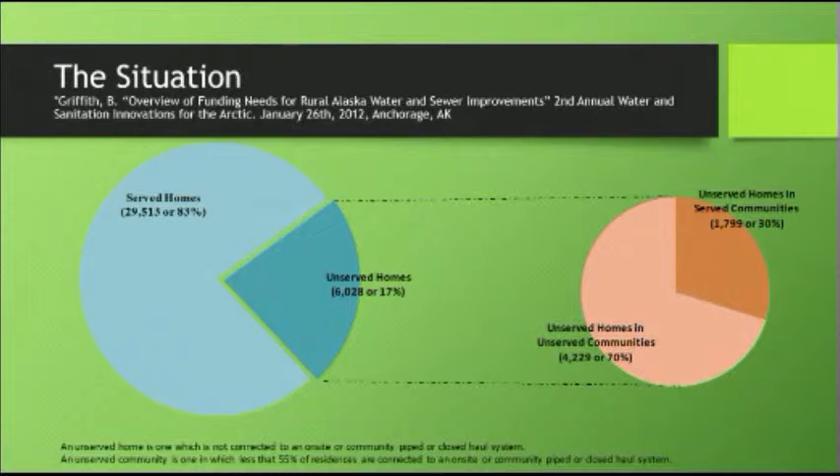Of these, they broke that down further into homes that could probably be funded and connected to the existing system, some that have no funding but need to be connected, and some that are just considered unserviceable, meaning the home might not even be structurally sound enough as a place to really live, so putting infrastructure into that home probably wouldn't be a good idea anyways.

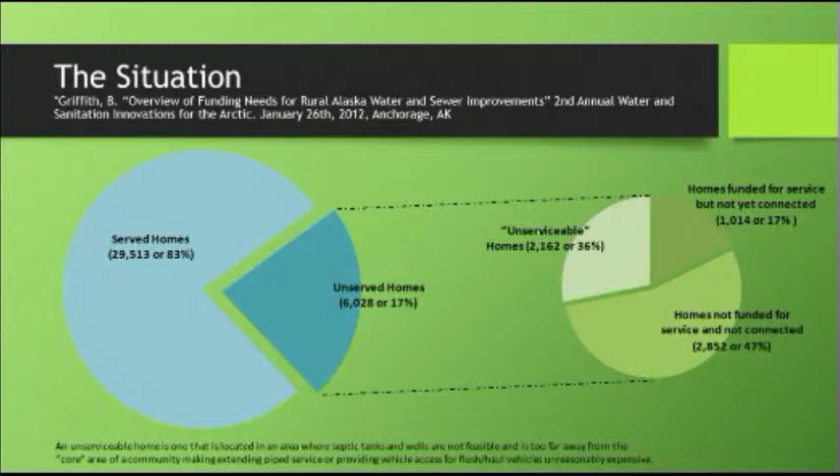So with this, the project, the Alaska Water Sewer Challenge, evolved mostly because the funding gap between what funding is being provided to the state and what funding needs to be put out into these communities to meet their needs with respect to installing plumbing is getting bigger and bigger with time. In 2013 it was 638 million; the last number I saw was 660 million. So it'll just keep growing, and I can only imagine it'll start growing faster as some systems fail that are being challenged right now.

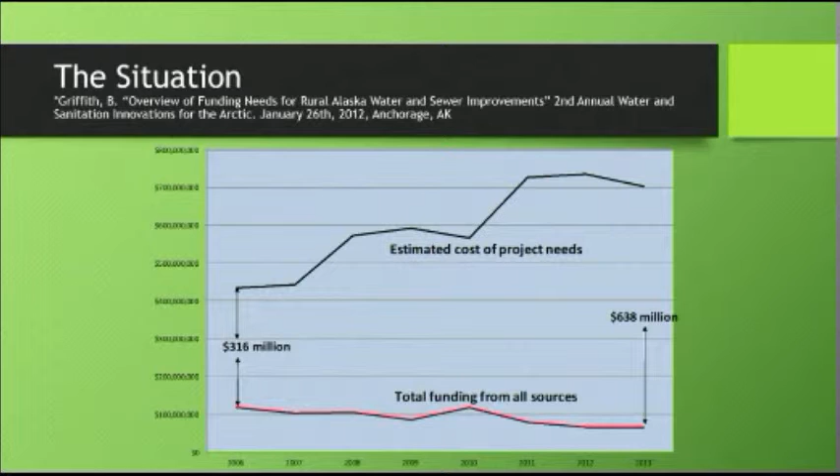Beyond its initial capital cost, which most rural communities are granted their infrastructure without direct cost from them, the operation cost is left up to the communities themselves.

So how can we bring the monthly, annual operating cost or bill to the consumer down? Utilities as it stands cost too much to install. Monthly costs are way higher than people can sustain. Where do we go from here?

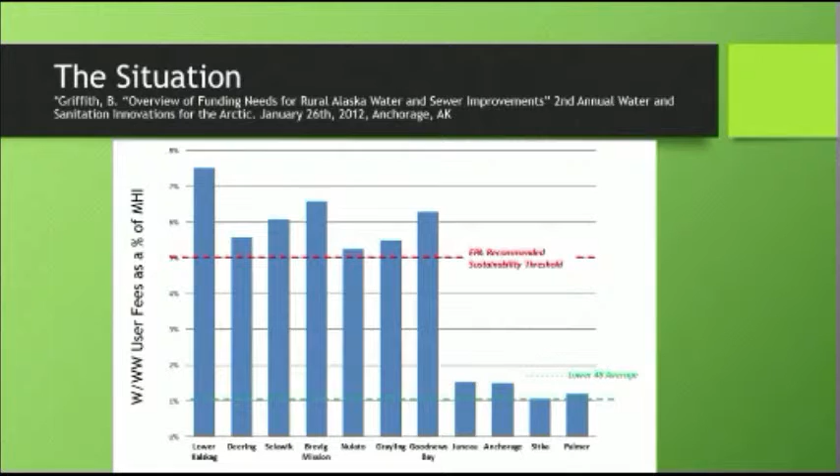So we look to another concept looking at decentralized water, putting water in people's homes. The most classic term is well and septic, but our conditions here in Alaska make well and septic a bit of a challenge in some instances. So this project we're going to talk about today is, if well and septic doesn't work and if nothing else works, this concept of water reuse has a possibility.

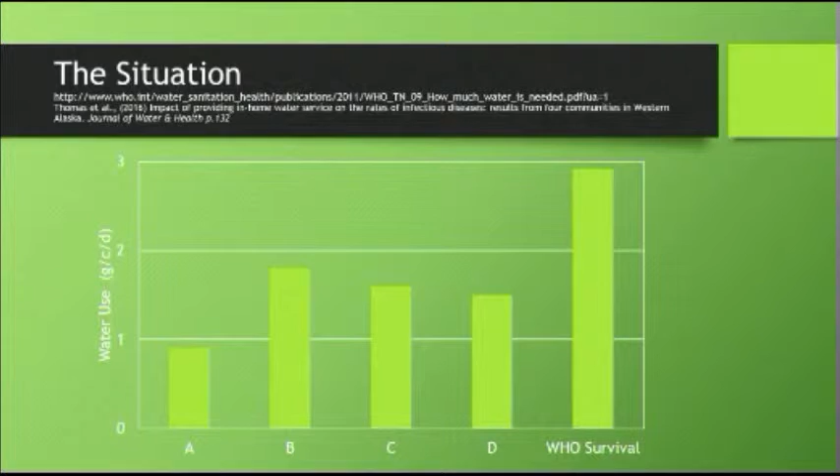So some of our communities, when you get plumbed water at your house, approach that. Community D, on the other hand, didn't change much. They increased probably 3 or 4-fold, but didn't get up to a really high water use, primarily because their billing structure was prohibitive and essentially made people drastically conserve water to avoid the user fees. So even in that case of drastic conservation, we're now at least above the WHO's survival requirement, which is a good thing.

Looking toward the Alaska Water Sewer Challenge, we are targeting 15 gallons per capita per day. So we're above Village D, but notably below the other villages, as well as below the national average. But the hope is that that amount of water, if used appropriately, would still feel like you're in a fully plumbed home. It wouldn't be any different, just you'd have to conserve water.

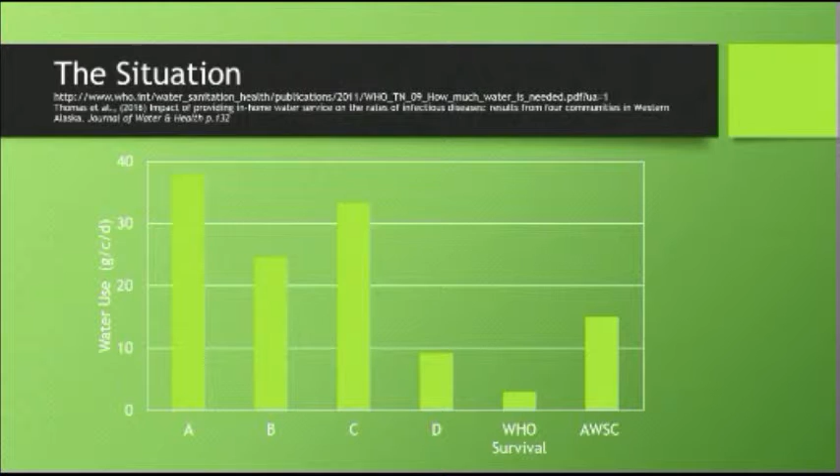Taking from the Alaska Department of Environmental Conservation's website, we can take the challenge they put out: develop innovative and cost-effective water and sewer systems for homes in remote Alaskan villages. Technologies to be addressed are decentralized water and wastewater treatment, recycling, and water minimization systems, to significantly reduce the capital and operating cost of in-home running water and sewer for rural Alaska.

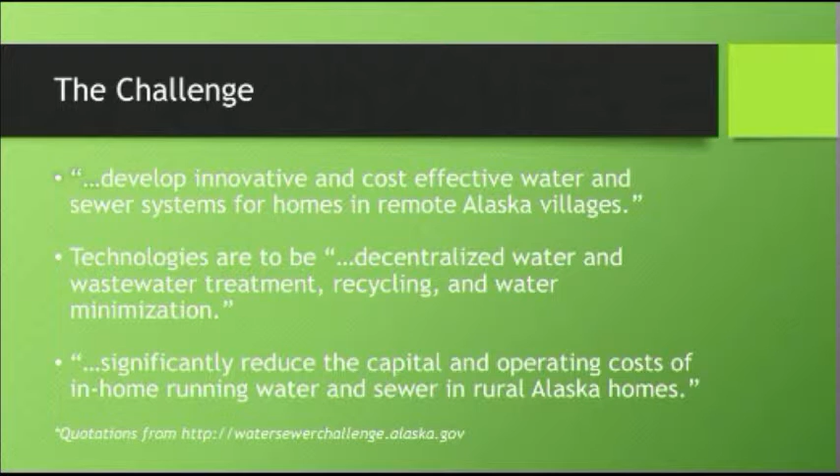That's our goal. With that goal, they've defined 5 phases of this project. We currently are in phase 3. Phase 1 happened in 13-14, forming our teams. Phase 2, we were funded for a year - 10 teams were funded, and 6 teams were funded for a year to go out to assigned communities.

So, pretty aspirational. I think this project is definitely on the national radar. We're the first to pursue something like this at the household level.

Decentralized water reuse has become a pretty hot topic. The City of San Francisco has pursued this hard with the Water Reuse Foundation, but they're really trying to consider reuse as just for toilet flushing, irrigation, and waters not for human contact. This changes the game. We want water that's going to be in contact with somebody as they take a bath, a shower, use it in their home for hygiene, and how might that vary from drinking water?

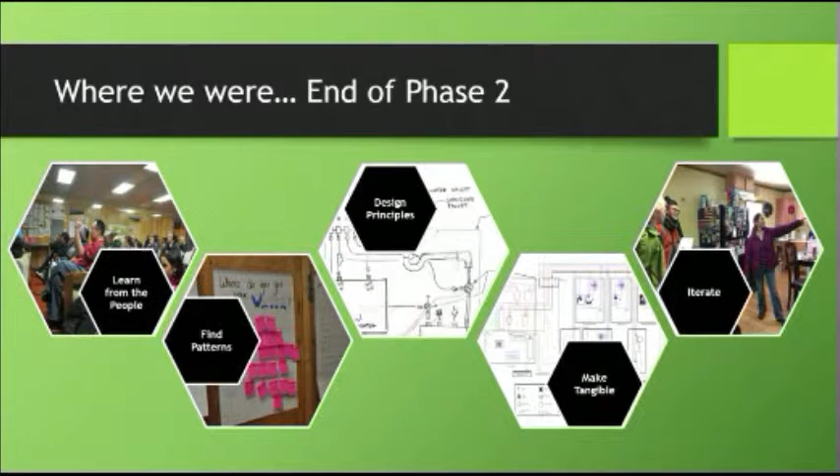So what did we learn? This is my summary of a variety of the questions we had. We asked some basic ones and then some quite complex ones. First one: how many people lived in your house?

Blue is Koyukuk, brown is Kipnuk. Less people live per home in Koyukuk in the interior than out in the YK, which didn't surprise us. The YK is growing and the interior in many rural communities is shrinking a bit.

Did people leave their house in the winter and allow their house to freeze? More did in the interior than the YK, which is interesting.

If you had to put a treatment system on at your house to reuse water, would you mind it being in a box outside your house? No one seemed to mind. By the way, the ones on the left are positive, the ones on the right are negative.

How many showers would you take a week? We asked this because the state, in our contract, had defined how many showers they wanted us to design to - a house with 4 adults, each taking 2 showers a week. So we asked, how many showers would you take as a household?

It was interesting to see quite the difference between the two communities. Koyukuk didn't seem to mind having fewer showers than Kipnuk. The other interesting finding was that Koyukuk had a washateria that was very well used, and the showers were very well used. Kipnuk had a washateria that was pretty well used, but everyone also had steam baths at their house. So the fact that people wanted still more showers in Kipnuk, as well as having steam baths, was kind of interesting.

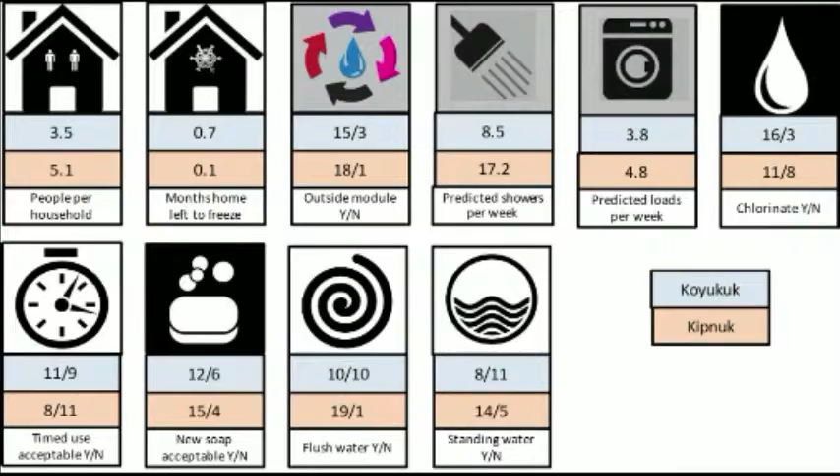With that, we moved on and said, all right, the state has delineated what treatment processes and fixtures we require. Through one of our questions, many people said, hey, our house isn't big enough to have a toilet, a kitchen sink, a laundry, a bathroom sink, a shower, and whatever you need to provide drinking water. So it became very obvious that we needed to treat all of these fixtures as modules in our system.

So we made them exactly that: modular, designed kind of independently of each other. You could have one, you could not have one, and it didn't matter to the treatment system. Outside of these modules, we had a core module. So for later on, I'll try to highlight: this is our toilet, as expected. Double sink is the kitchen sink. Washing machine, shower, bathroom sink, and the bucket with the water drop is the receptacle for our drinking water or other water, as you'll see later. So we had these six different fixtures you could put in your house, plus one core module that would live outside of your home.

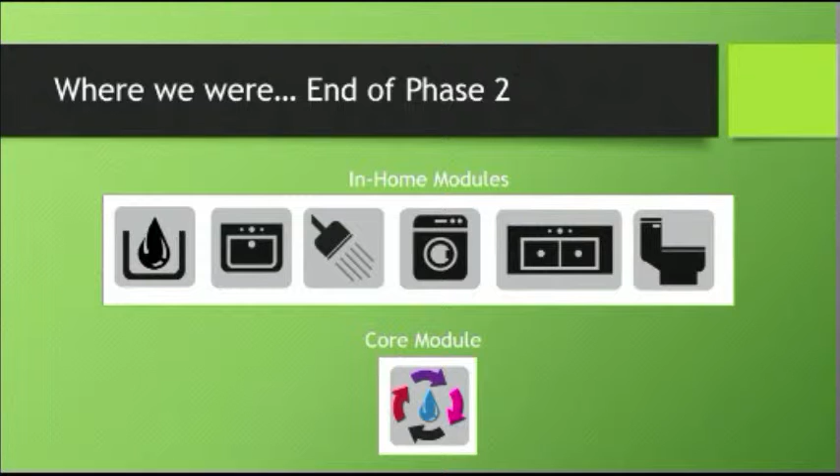The interesting thing we did with our fixtures is a lot of people said, hey, you guys are going to retrofit all these fixtures into our house, that seems like a whole lot of work. Having gravity plumbing, we know gravity plumbing freezes. With vacuum toilets, we had the most spectacular people share crazy stories about the excitement of using their first vacuum toilet. So we tried to look a little different.

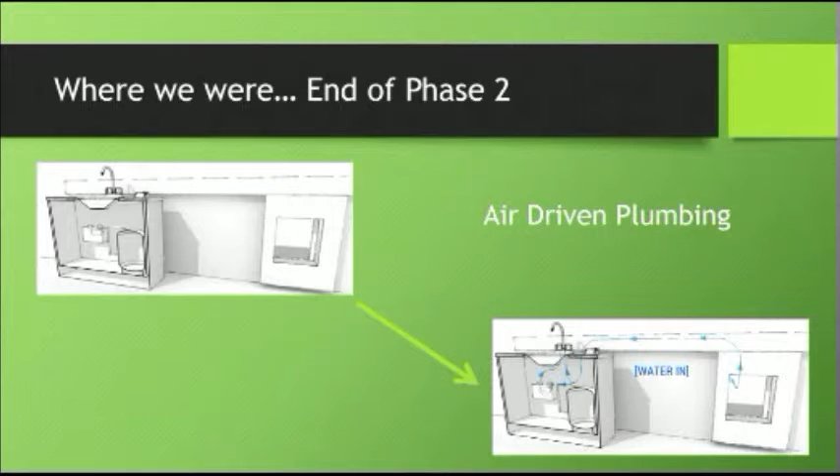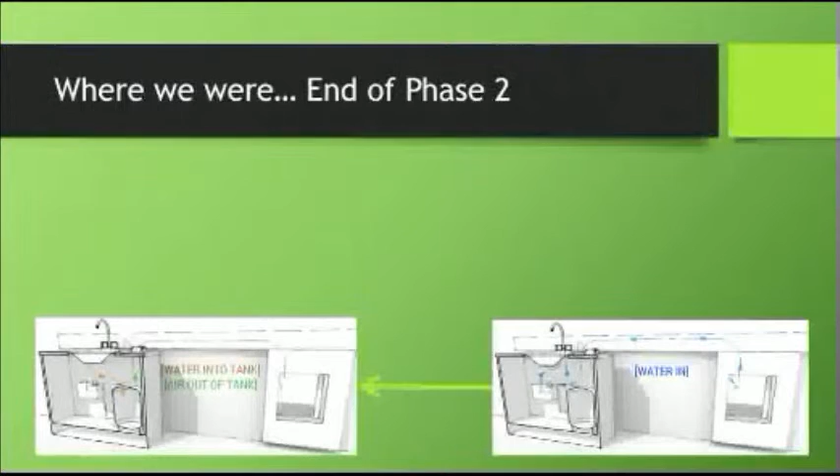This process isn't uncommon. In fact, if you've had beer out of a keg, you've experienced this process firsthand. We're using air-driven plumbing for the most part. Imagine your sink, instead of going to a drain pipe, has a vessel below it. Water fills in your sink, comes out of your spigot, fills this vessel below your sink. When it fills, the vessel is vented out to the atmosphere, outside of your house—you don't want potential sewer gases coming out of that area. Once that vessel is full, it says, hey, I'm full, do something about it, and it closes the tank.

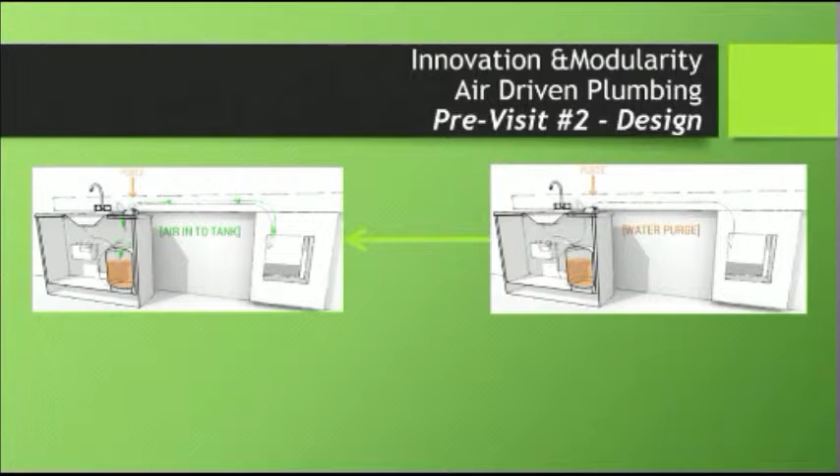It allows air to enter into the tank. There's a tube that comes out, the thing that would dispense your beer into your cup, and now it's dispensing water out of this tank. It dispenses the water, exchanges it for air into the tank, sends it back out to the treatment module.

Now our system is clear and ready to be reused again. The benefit of doing this: all of our plumbing on our sewer side can be very small diameter. We're pressurizing it using low pressure air, about 15 psi. No gravity plumbing. The other bonus, we can blow the whole pipe dry when it's not being used, so the line headed out through the wall into another heated vessel or container could be dry. No chance for freezing if there's no water present.

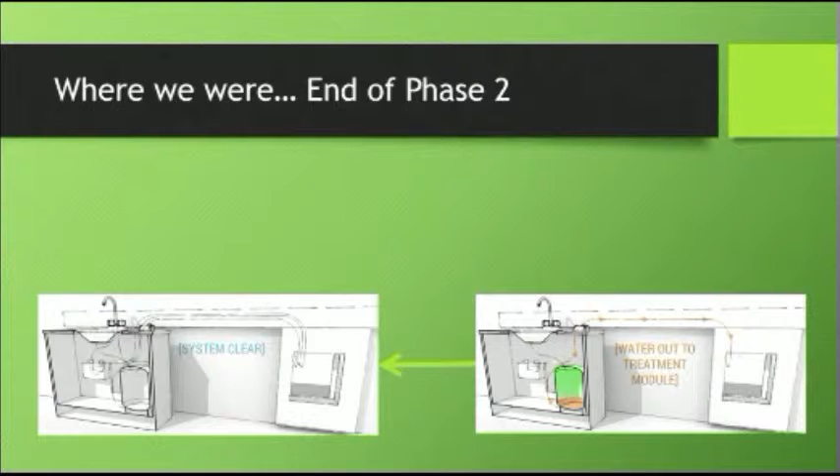A primary loop, which allowed drinking water within that loop to be dispensed at your kitchen sink and your bathroom sink for washing your dishes, cooking, brushing your teeth, things where you'd want the water in your mouth. The secondary loop around this main one is the treated non-potable water. We called it that at the time of our first presentation; it was dispensed to your fixtures for general hygiene use, washing your hands, washing your clothes. It was then processed as gray water to a membrane system, which retreated it to be recycled in that first primary loop.

Your kitchen sink water can be pretty nasty. It can have oil in it. It can have other things that you might not be able to easily treat. It's sent over to another treatment system and then recycled in a much smaller loop to allow the toilet to flush.

In this system, you had to provide drinking water in at 2 gallons per day. You had to provide some other source of water of your choosing into the system at 8.6 gallons a day. You had to haul what you flushed, the full flush in your toilet, at 2.5 gallons a day, and you had to haul the treatment waste, which is concentrated gray water, at 1 gallon a day. And then there was some excess water left to be dumped on the ground.

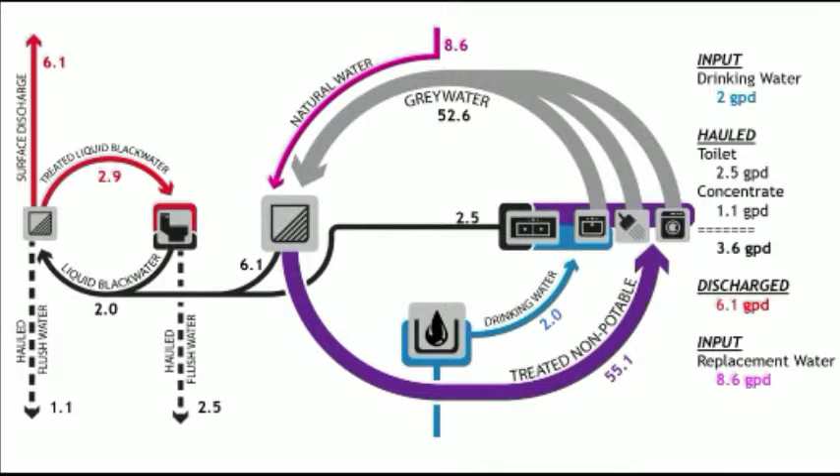We had some concerns from the state and others about discharging water onto the surface. Would that cause a glacier in the winter? It also caused some complexities doing it this way, so we continued to evolve through phase 3 to select our treatment process. We'll continue down that road.

This is what we showed the state for what our fixtures and treatment process would be like. The drinking water module I mentioned would be a container like this in your home, built in to look like a cabinet. You could open the lid and pour your drinking water in from wherever you comfortably feel you want drinking water—blue being washateria water, pink being ice melt, snow melt, you name it, whatever you like to drink.

Underneath the sink, we have a small filter for coarse filtration, something like this, which is a 1 micron filter just to take out debris. And then we have a small UV system. That would ensure that even if you brought water that was good in every other way, but maybe contaminated it with dirty hands and had a pathogen or two in it, at least it would be safe and not get you sick tomorrow.

So we're left with this question: will the UV protect against viruses adequately? Bacteria is easy—with UV it's viruses that are hard. So the dose on this UV device would not be suitable to handle adenovirus.

For 4-log adeno, you'd probably get more like 2 out of it. This one was sized at 40 millijoules per centimeter square. So bacteria, no problem. Crypto, no problem. Giardia, no problem. Viruses, only 99% removal, not 99.99.

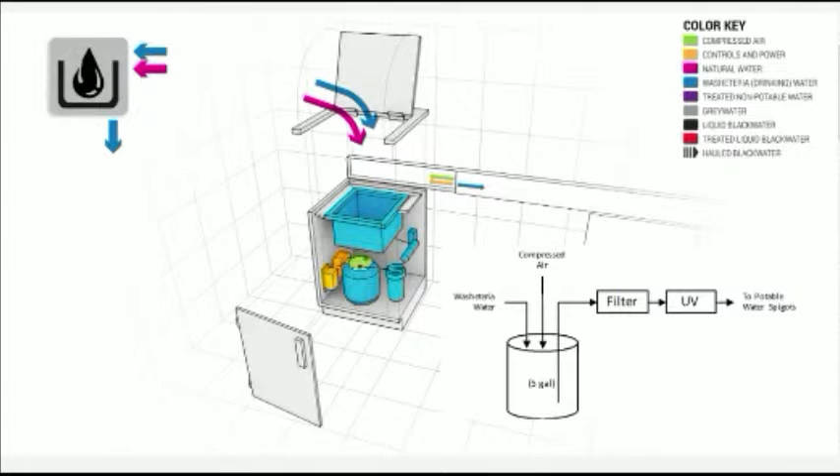I'm not particularly worried about this system, because people in rural Alaska, as well as me, when drinking from water sources that aren't coming out of a trusted spigot, are pretty careful about where they get their water. I don't go pick water from a place known to be contaminated. So hopefully this will give you just a little extra assurance of treatment, but not a whole lot.

The next thing we designed was a little 10-foot connex to put all our treatment system in: 2 treatment vessels or devices, which is this black column and this purple column, and then some tanks, which are the barrels up on the shelf, and our air compressor, all fit within the 10-foot connex, so that hopefully all of the things needed to be taken out to the community for installation could fit there. So we pack it up here in Anchorage, send it out to the community, it gets constructed. The container that it was shipped out in would be the container that would house the treatment system - no backhaul required. So we left this, we were pretty comfortable with it.

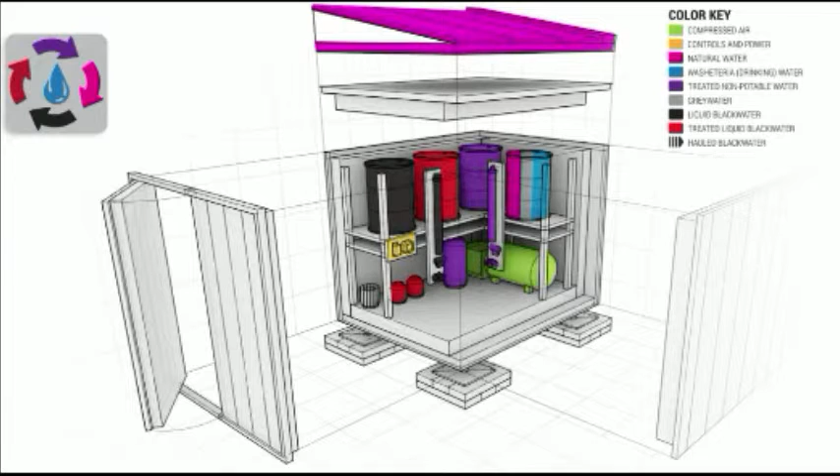These are the two line schematics of the treatment systems within that housing. We collected gray water, coarse filtered it, and it went through a nanofiltration system. We had 2 UV systems in series to achieve 4-log disinfection of viruses, and it was then stored for reuse. Black water was the same thing - it was treated for reuse in the toilet, and then the waste product was ready to be hauled off site in another system. So we were pretty comfortable. I think the state was comfortable enough with what we did that we moved on to phase 2 with this.

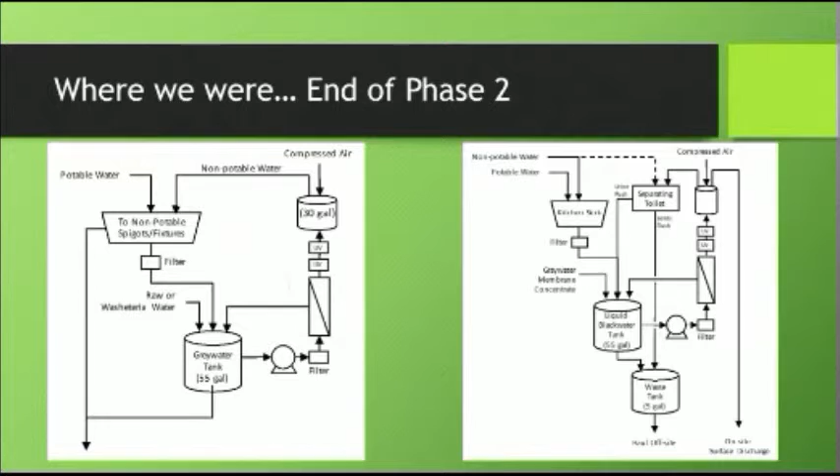The one thing you'll notice is that I only have one membrane. This is our membrane housing, which we had in both the old design and now in my hand, so obviously it's in the new one too. This is our membrane system. Most membrane systems work in arrays with lots of membranes to get the recovery you're targeting, but we don't have that opportunity here since we're minimizing components. So what we're going to do is this membrane concentration in a single batch.

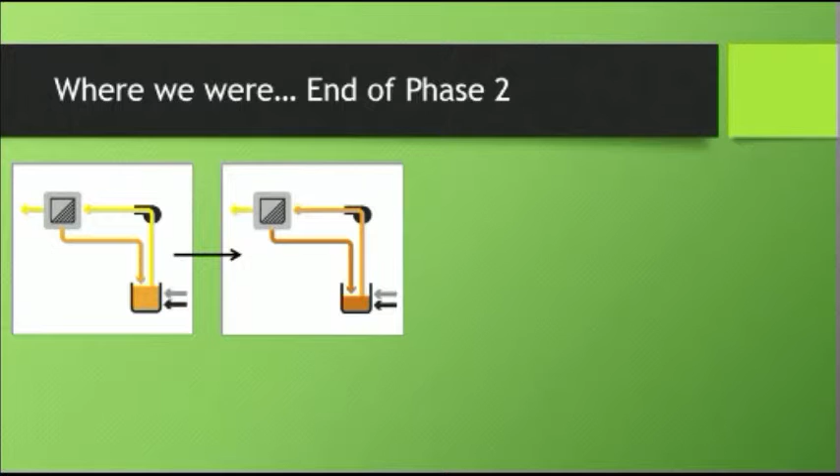This figure shows that: here we have a tank of water. We draw water from that tank, the treated water goes through the membrane - that's our slash - out the other side. The water that's now concentrated by the membrane is returned to that tank. We continue to recycle, meaning that tank gets more and more concentrated with time, and keep going. Now it's delineated as red, so that water has become too concentrated - we don't want to continue treating it anymore, and now we send it out to waste.

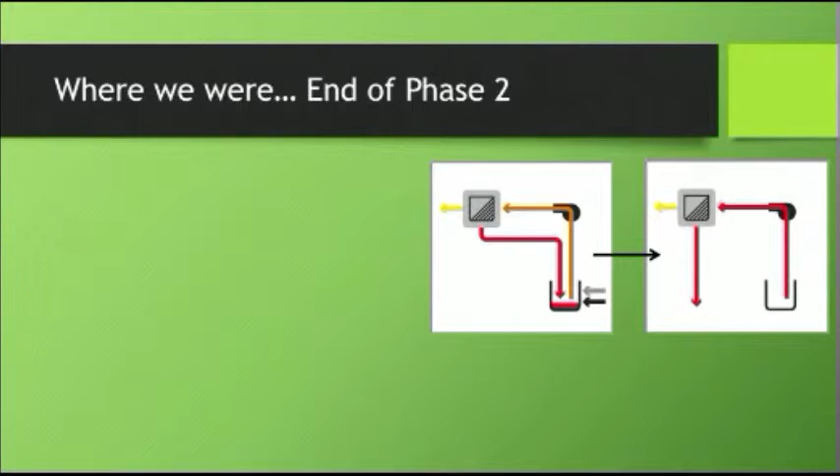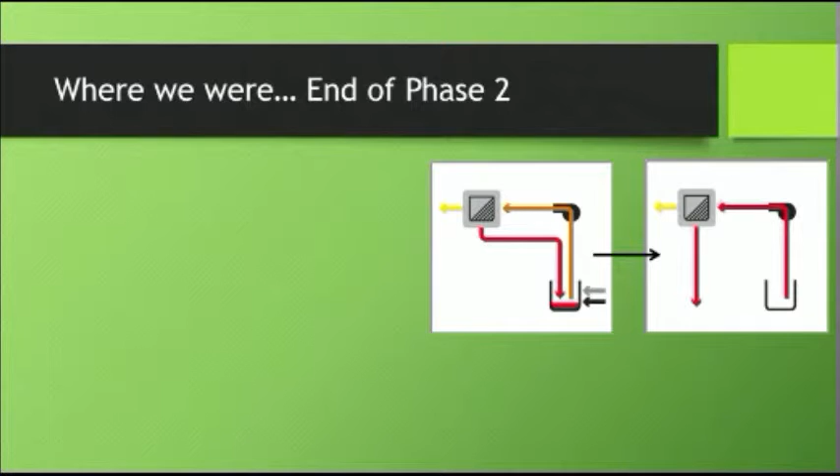We try to think of our water like a sponge. Our water picked up all this debris from coming into your house. You want to get all the debris out, but you still want the water, because you don't want to have to go back and haul more water from the washateria or the pond. So we squeeze that sponge - get all the water out - and then throw the sponge away. We're using this idea to try to maximize use of our membrane system. Then once the tank is empty, refill it and start over.

How do you monitor or control it? We're going to probably be using conductivity to look at the concentration of salt. The water being recycled - our membrane can actually reject salt to some degree - and once it gets so salty, we're going to get rid of it. Trip it and dump it.

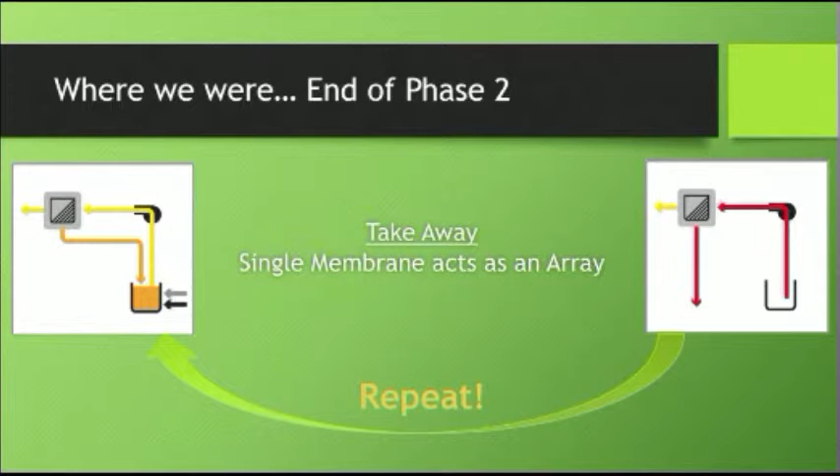The other thing we have up here is what we're using to help maximize use. I think an impression we got from many people in the communities was: if we're going to put a toilet in our house, and we're trying to look like a house that could be anywhere in the world in a developed community, we want a real toilet. We don't want a piece of plastic or metal from an airplane. We want a real toilet.

So this is a toilet created in Sweden called the EcoFlush. It's a separating toilet—you're welcome to come check it out after the talk. It has 2 containers. It's not like the dual flush toilets you see elsewhere where you hit a big flush or small flush for the same bowl. There are 2 flushes here, but they actually flush 2 different compartments. If you hit the urine flush, the small flush, hopefully you peed in the right hole, because it only flushes the little front one. If you created solids, hopefully you did it in the back bowl and hit the big flush, and it goes out the back bowl.

The flush for urine is only 0.05 gallons per flush, really small. For a full flush, it's 0.66 gallons. A lot of people I know in California who've been playing with these say there are 2 biggest problems: one, men don't always sit or aim accurately enough to get into that small hole, and two, small children find it challenging to get it in the right place. So maybe someone needs to redesign a cool little kid seat for this.

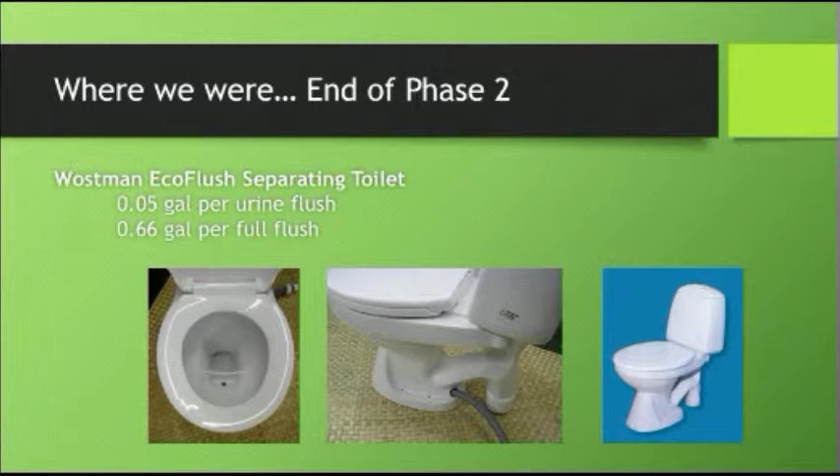Check it out—it's been a total nightmare to get this toilet, but if this works, we should directly order them from Sweden.

All right, so that's where we left off in phase 2. We were excited to get going. We knew what we designed had potential to work, but I can't sleep at night, so I continued to evolve our design.

Since then, we've changed our water conveyance scheme slightly, using small independent pumps for conveyance to the fixtures, as well as still using our air-driven collection. We've also associated independent filtration that resides in the home.

For each one of the fixtures—your shower, your laundry, your kitchen sink—you would have a pair of filters like this inside your home, so that if you or one of your children dump something crazy down the sink, you only have to fix a small filter. This is a $1 filter and this is a $3 filter, rather than dealing with whole-home equivalent filters that are like $150 each.

So it provides this: hey, I just dumped a gallon of oil down the sink, I better go get it out of my filter before it wrecks my next system. But it doesn't wreck all of your systems, just one of them. It also allows us to keep each one of those fixtures in your home independent. If you didn't have a bathroom sink or kitchen sink, and had a limited number of fixtures in your home, you wouldn't have an oversized filtration system that costs a lot to run.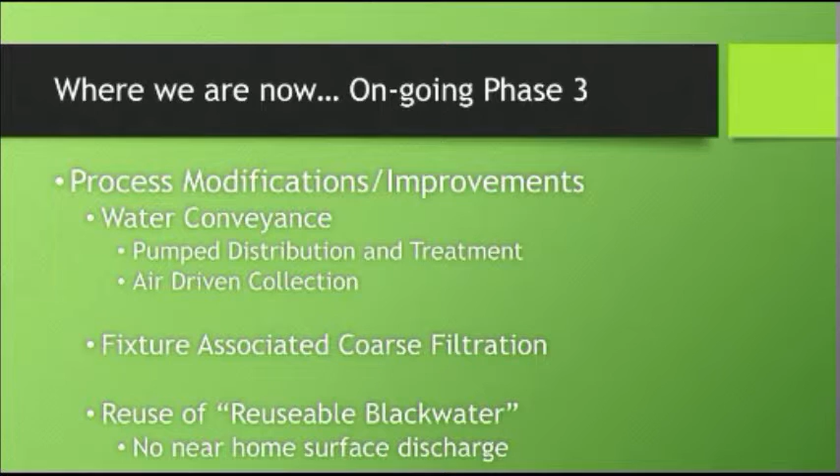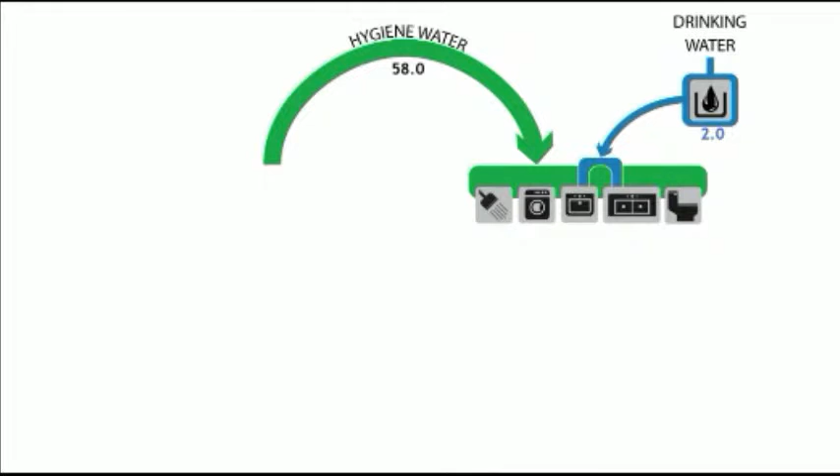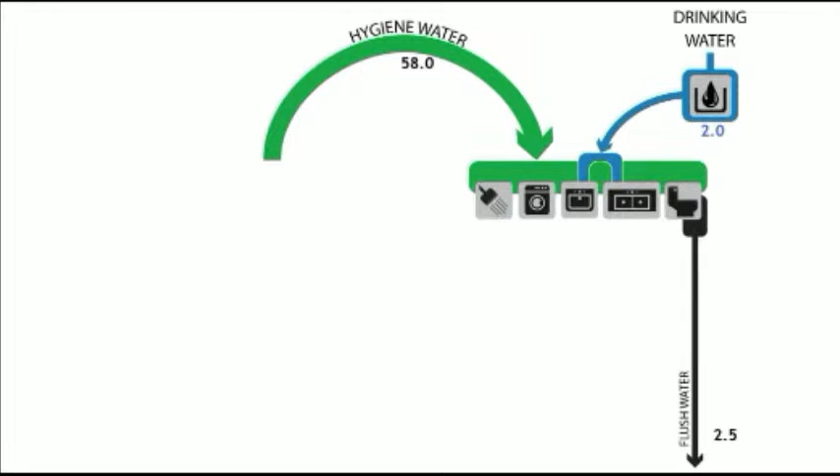So I'll explain this figure a little more clearly. This goes back to our fixtures. We bring drinking water in, dispense it to our bathroom sink, our kitchen sink. We have a toilet, a washer, and a shower. We then use that water, we flush our toilet, it gets hauled—that's the big flush on our toilet. We then use our shower, our bathroom sink, and our washing machine.

It gets sent over to our treatment, the core module, where it's treated through one of those membranes, and that membrane has a reject stream.

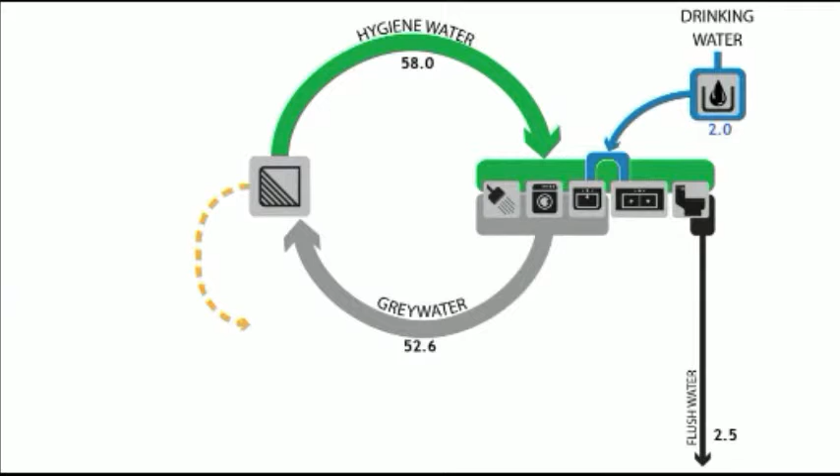If you were to stop here, which is totally a valid choice for a homeowner—though I can tell you there are people anywhere who wouldn't skip the next part of our treatment system—if we do stop here, we end up with a situation like this: you have to haul 6.5 gallons of water from your toilet and kitchen sink daily. You have to replenish your drinking water and the water rejected by the treatment system. So in this instance, you bring 12 gallons a day of replacement water in, you haul 13 gallons of water, and you bring in 2 gallons of drinking water—you're good to go.

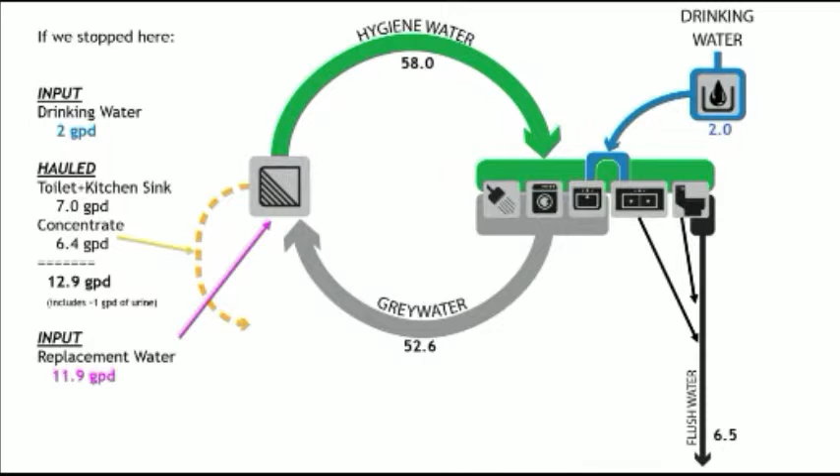Now, what we did here, and what we'll be testing on campus, is kind of the next generation, trying to go back to the true model of making something that fits in the scheme of today's current practice. So we add a second treatment system.

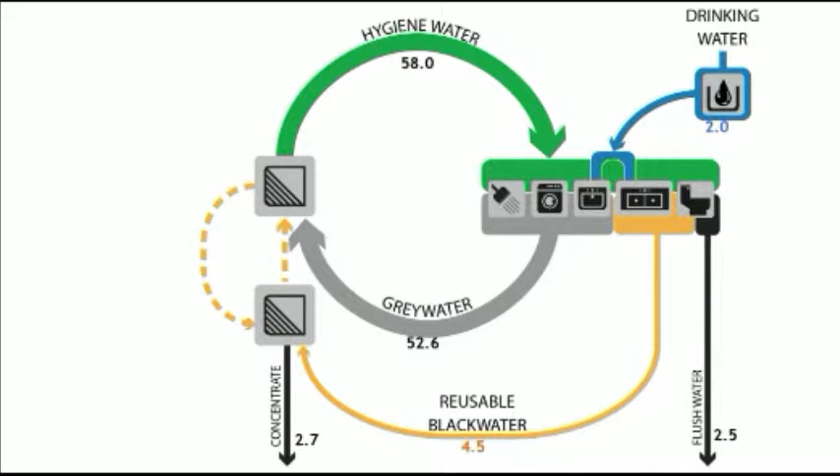This is our black water treatment system. We take the small flush from the toilet and the kitchen sink, and send it as reusable black water to the first membrane system, where it's treated. The treated water from the kitchen sink and toilet is then treated again by a second membrane before it's reused. In this instance, we only have to bring in 3.6 gallons of water from any source, 2 gallons for drinking water, and haul 5 gallons a day for waste.

So now we're in the same realm that Tim Thomas identified. In a community without plumbing, people were carrying between about 1.5 gallons per day per capita. So 1.5 gallons per day per capita in a household of 4 is about 6 gallons per day. We're bringing about 6 gallons per day into this house, and we're now getting 60 gallons worth of water use. So this doesn't change the practice of an existing community, it just increases the water available at someone's home for use.

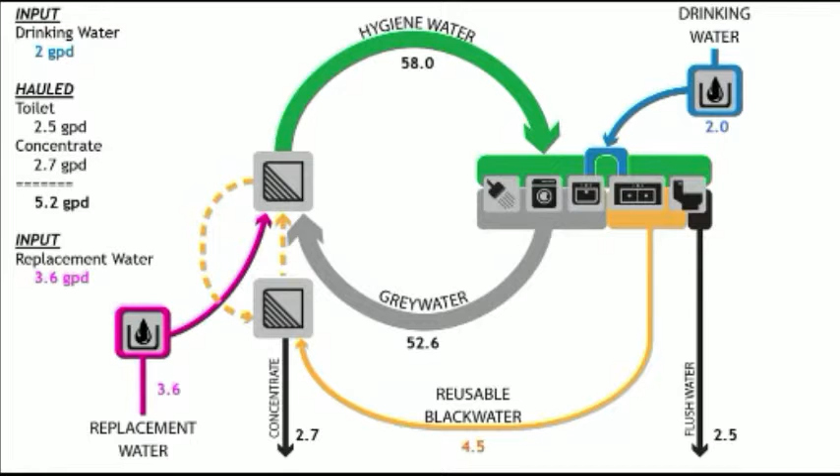So we're totally stoked. I think I might be a little overzealous on our treatment side, but I'm hopeful, and that's the reason we're using some pretty cool industrial processes here. So this is where we stand today. This is what we're building out in the back behind the building. So, things to keep in mind.

Our drinking water system, we actually have it mostly built right now. We're going to use a 1 micron cartridge filter like this, a little $1 filter, and then disinfection with 40 millijoules per centimeter squared at 2.5 GPM. This is a Viqua VT4, a little UV device under the sink.

It's a 20 watt light. So if you can run a 20-watt light, you can keep your water disinfected. Pretty cheap overall to run, added protection against transportation contamination due to UV, and basic pathogen protection.

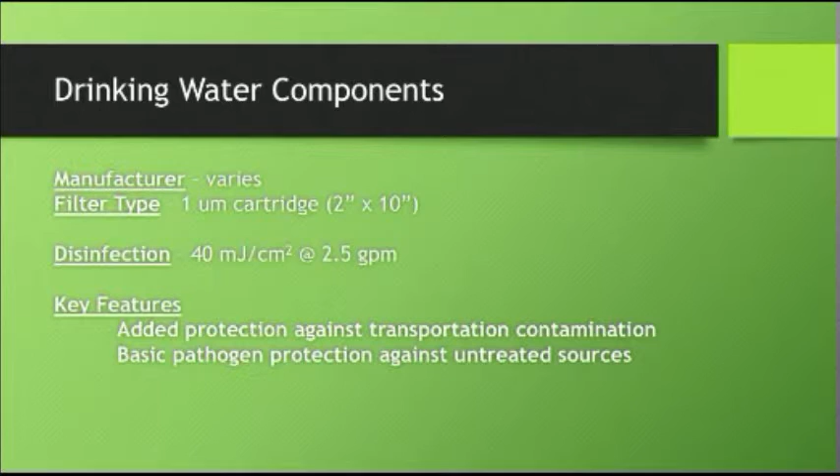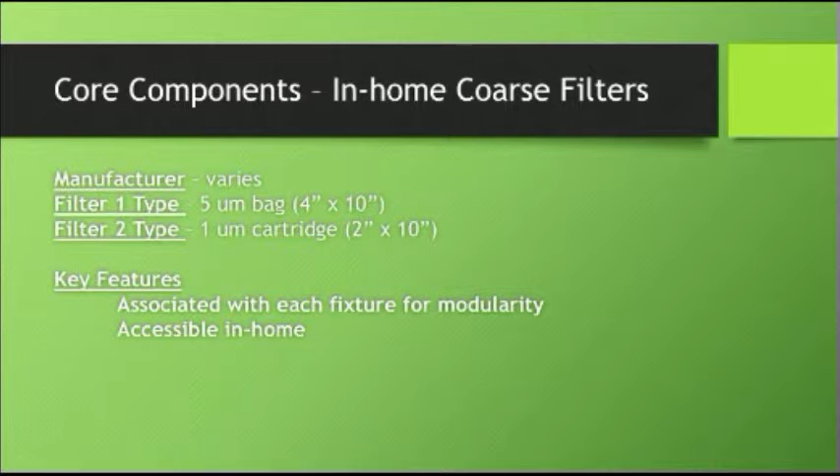So in our core module, we now expand into a pair of filters per fixture, our bag filter and our 1 micron cartridge filter. This provides the modularity we need, and it's accessible within the home in case it breaks. No one wants to go out and change a filter out in the shed outside if they don't have to, so we'll put it in the home.

Our membrane that we're going to be using is actually up here if you want to take a look at it. It's a nanofiltration membrane, a HYDRACoRe 70 pHT. It's a really cool membrane, actually an industrial membrane made to treat far more water than what we are doing. It produces water at about 5 gallons per minute, is what we're projecting right now. So this could produce a whole lot of water for your house.

But the idea here would be that if power is unstable, if other things are unstable in your community, you could produce a day's worth of water in about half an hour. So you turn on the system, run it for half an hour, and you have enough water for the next day. The pore size of that membrane is 750 Dalton, pretty small.

It rejects salt. The cool part is it's chlorine resistant, meaning if it gets gummed up, we can actually chlorinate the membrane. It can handle 100 parts per million of chlorine for cleaning, or 10 parts per million constantly. It's fouling resistant based on the charge on the membrane. The membrane's intention is for treating pretty crazy industrial compounds, and very highly colored water. So we're really hopeful with this membrane.

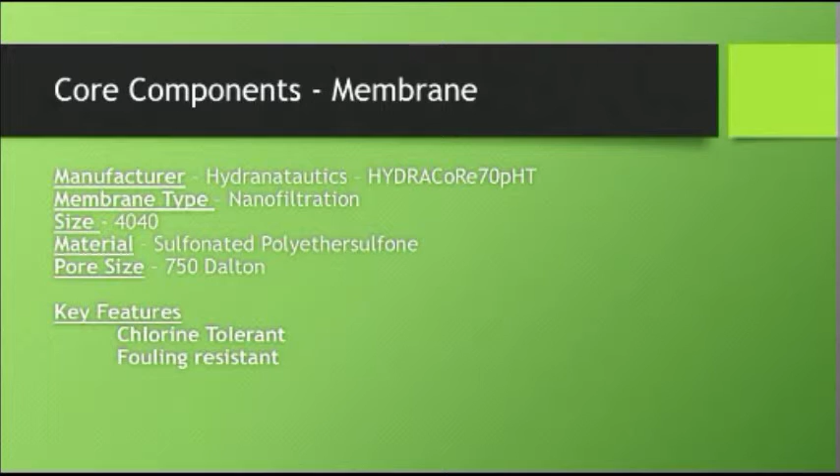Our UV disinfection system inside of the home is a Viqua. It doesn't really have a name, they just call it their adenovirus system. It's actually 2 Pro 20s in series. It's validated by the EPA at 4 log virus up to 15 gallons per minute. So we're going to actually get more treatment than we need.

And if you think about our treatment cycle, that black water is going to go through the membrane and the UV twice. So we're going to be doing almost approaching possibly photocatalytic, or not photocatalytic, photolytic oxidation that we might have. Again, this will only be run when you're producing water, so that half hour a day, you turn on these lights, it runs, and it turns back off.

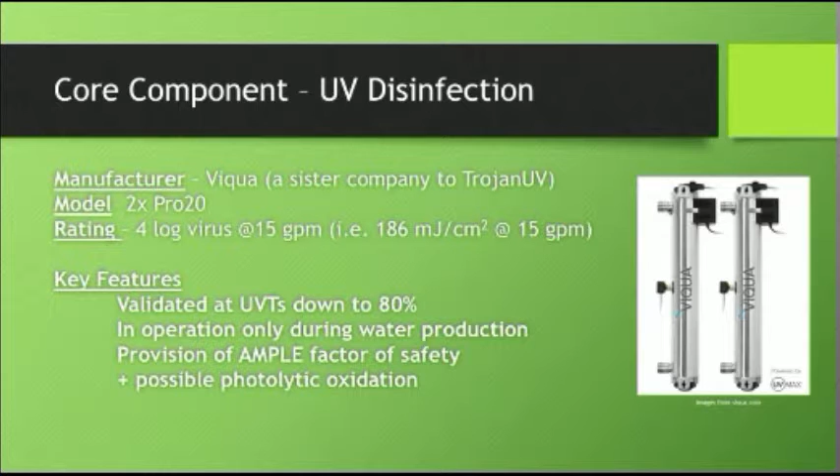So I didn't have time to redraw this, so you get to look at my hand sketch. This is the hand sketch we sent to the state illustrating how our system works.

We're actually going to be reusing parts in the system. We have one pump that drives both membrane systems, and one UV device used for both systems. There are valves in the system so that if we're treating black water, we take water from the liquid black water tank, use our pump, treat it with the black water membrane, pass it through the UV system, and put it in the gray water tank. If we're treating gray water, we use the same pump, pass it through our gray water membrane, use the same UV, and put it in the hygiene water tank.

This allows us, with the valves, to keep our membranes washed with clean water. It also lets us give a homeowner the choice of, hey, the kitchen sink and the toilet - I don't really want to deal with that in my house. So as a homeowner, you can just select to not use this by valving out part of the system. You don't have to change the drawing.

So the homeowner is going to need to turn some valves every day? No, all of these are automated valves. So we'll have a system built together. I'll talk about automation.

So in this, as you'd imagine, the black water goes through all of this treatment, all the way to the hygiene tank, and the gray water only goes through a small amount. Based on the literature, for black water we have 8 to 24 log inactivation of organisms, and pathogenic removal of 10 to 24 log. So 10 log is 99.99999999% removal of pathogens.

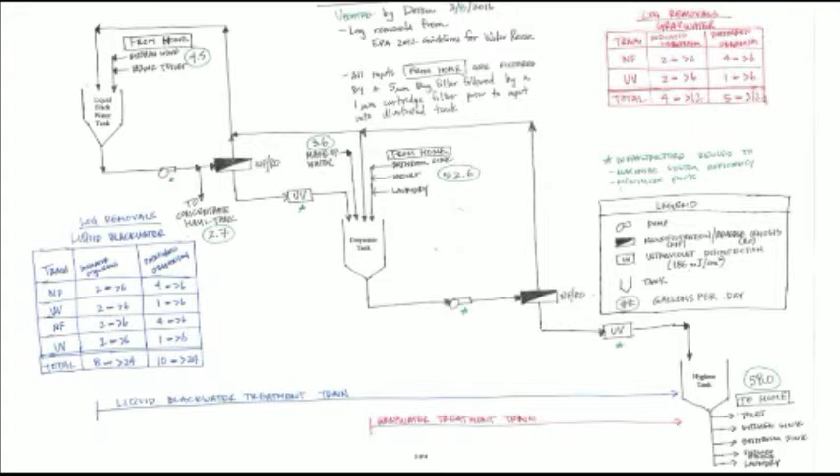So we did some preliminary testing, not with this membrane that we have. I'm more hopeful with this membrane than the weird Chinese membrane I had in the lab. We took a little system in our lab, a little pump. In here we had a 1 micron cartridge filter and then an RO membrane that was not a very good one. And we treated gray water that we made.

The gray water that we made was made of all this stuff. You can come and check out the stuff, and you're welcome to pass this around and sniff it if you so desire.

The gray water is created according to the National Sanitation Foundation's NSF 350 guideline. It's a recipe, it uses all these ingredients, and that's what we treated.

We concentrated it by about 50%, and on this plot you can visually see this is untreated. Our experiment filtered it through a 1.2 micron filter, a 0.7 micron filter, a 0.22 micron filter, and then our reverse osmosis. With that, we found some pretty cool results.

Hey, you know what? It meets the DEC's suggestion of less than 5 NTU turbidity - in fact, it's the lowest of our treatment bunch. It meets the DEC's target for total dissolved solids, although the source water is also below the limit for total dissolved solids. And even better, it was the only one of our treatment systems that managed to remove enough organic carbon to be below the state's goal of 10 milligrams per liter.

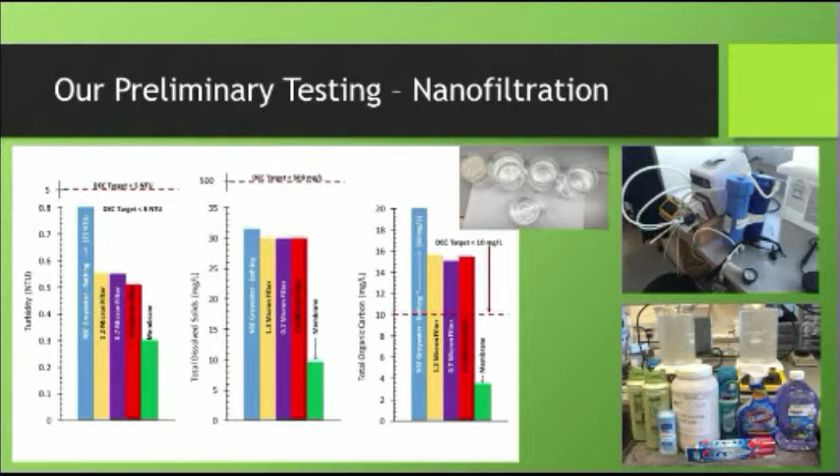It actually smells a lot like really flowery soap. When we treated it, this water smelled like peaches. We don't quite know why it smelled like peaches, but it did. We know there's still organics in it, so there's something left behind that fit through our membrane. So different membrane, we're still hoping for something, although I wouldn't be adverse to having peach odor scented water to take a shower in.

The other thing we've been doing, I had an electrical engineering senior design group do some work for us where we are proposing that instead of using a centralized hot water heater in your home, again trying to keep everything modular, each one of the fixtures you'd think about having hot water in—your shower, your bathroom sink, your kitchen sink, and your washing machine—would have its own independent hot water heater.

I hate when I say that, water heater. I hope we're not heating hot water anymore. Its own independent water heater.

And so the thing about this is these are electric water heaters. Electricity costs a lot of money, as well as a lot of communities couldn't tolerate if you put on 4 water heaters into someone's house. So what we had this electrical engineering senior design group do is to build a circuit as well as a logic model that would allow each one of these hot water heaters to be connected into the same outlet and operate only when they needed to, as well as with priority.

So if you went to take a shower and you started using the hot water, the system would direct its energy toward your shower to keep you having a hot shower. And then it would cycle through the other heaters to make sure they were all warm. And if you started using the laundry, it would then shift over to the laundry and provide its current there.

And so at any given point, the system only draws 11 amps. And these heaters are pretty robust. If they just sit there on the counter, it takes about a day for them to cool off to reheat again.

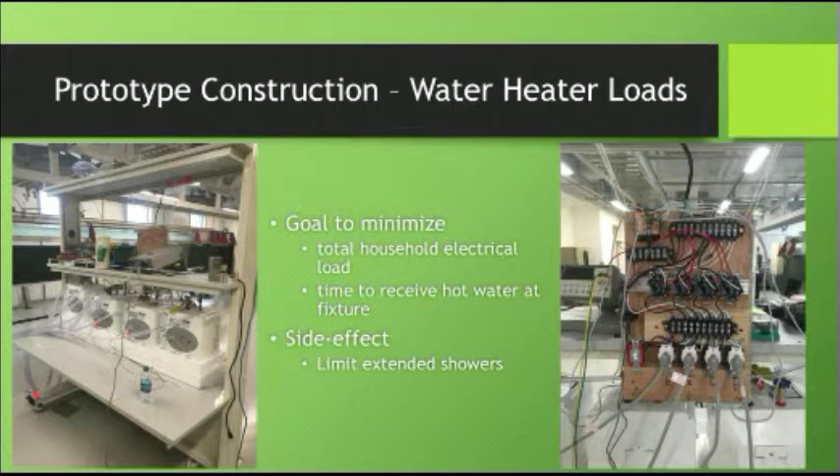The automation as well as the system control will be done using an Arduino clone. This is a Moteino. You can buy one of these controllers for about $20. It's a microcontroller with a radio on it. The cool thing about this is it's based on this concept of Arduino.

So trying to blend streams, we're using these in a lot of projects. They're really kind of fun. Beyond that, they're able to talk, so you could actually reprogram them without ever unwiring something. So you can stand in front of your sink if it's not operating right and change the way it runs.

So we're using these. I didn't bring one of those. If you want to see one, I can get one down here.

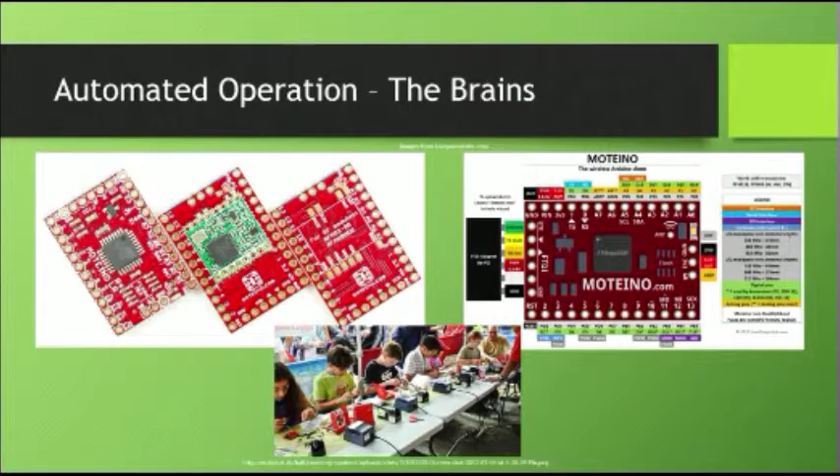So we have a lot of loading schemes that are prescribed by the state, and we're taking the loading schemes that are just based on hydraulic loading to a wastewater or treatment system and moving them into a tangible household usage pattern. Because I don't want to do a loading condition on my treatment system that is not tangible to do in our house. Like, no, I would never run my washing machine for 3 days straight. So we'll contend with those types of loading schemes.

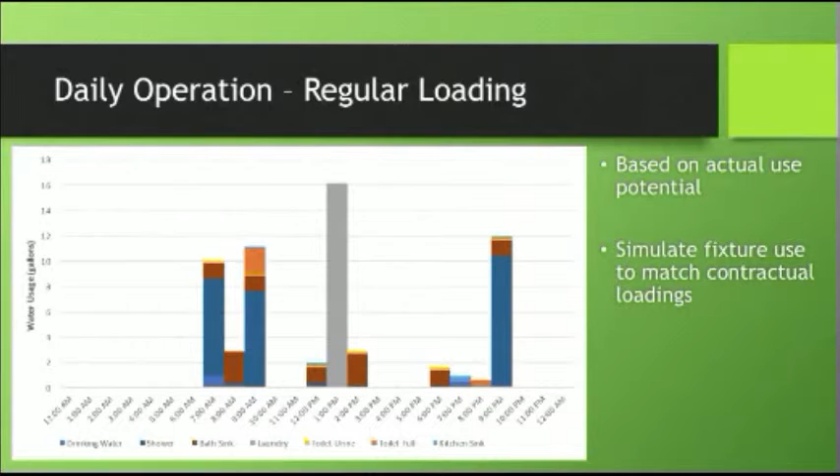The other fun one is that we are not going to be living in this house, and we're going to be recycling water. We're going to be making everything. As you saw, we made gray water. In fact, we're going to be making gray water concentrate to amend to the water that's recycled into the home. We're going to be making a different type of gray water for our laundry, for the washing machine. We're going to be making our own recipe for what goes down the sink. We're going to be making synthetic urine and synthetic fecal material. So it's all going to be this entertaining fun of us making all kinds of stuff. By the way, synthetic fecal material is dog food and gelatin. Entertaining stuff - mainly just to figure out how to flush the toilet.

Source waters around here: we're going to use local tap water to simulate washateria water. We're going to collect rainwater from the cabin itself to be used, as well as collect water out of the South Fork of Chester Creek, the creek that's right here that goes under the road, as a source water for part of our study.

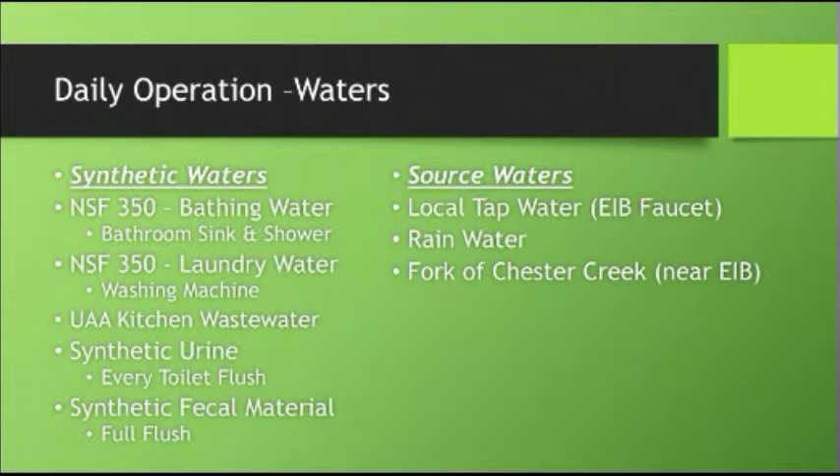The building out there will not have plumbing to it. It will have electrical, but no plumbing. So all water in and out gets to be carried by some student, and possibly me - probably me. I'll at least do it a couple times.